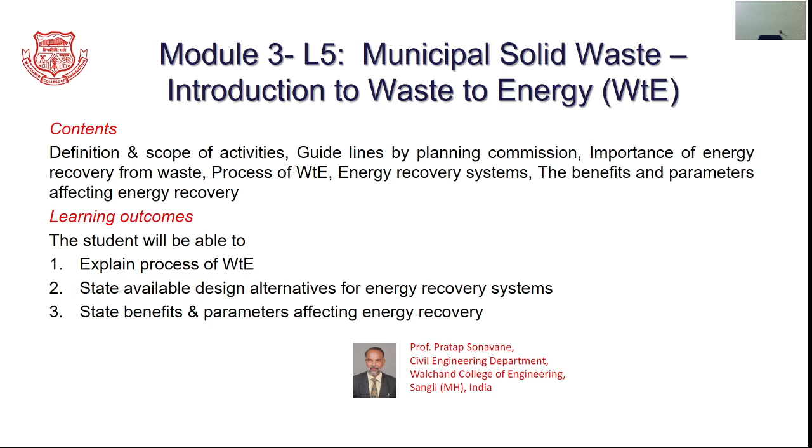We have been discussing the flow chart, especially the separation, processing and transformation element. So we know through certain processing facilities we are recovering the energy rich material, and that energy rich material is used to make useful products like refuse derived fuel, or otherwise these energy rich materials are transformed into energy by making use of thermal processing techniques.

We also know that the process of generating this energy in the form of heat or electricity is to be preferred only after following the elements of the waste management hierarchy such as reduction, reuse and recycling.

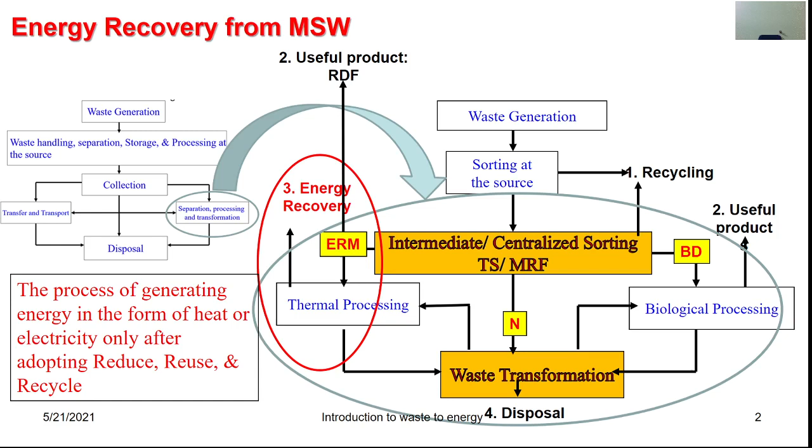Let's try to understand the meaning associated with energy recovery from municipal solid waste. The concept means the conversion of non-recyclable energy-rich waste components into usable heat, electricity or fuel by making use of processes such as thermochemical conversion, which produces heat energy or fuel, oil or gas, which in turn can be used to generate energy, or otherwise enzymatic decomposition of the organic matter to generate methane-like gas through biochemical conversions.

Ultimately, this methane is used to produce electricity. So, the processes of thermochemical conversion or biochemical conversion are commonly called waste to energy.

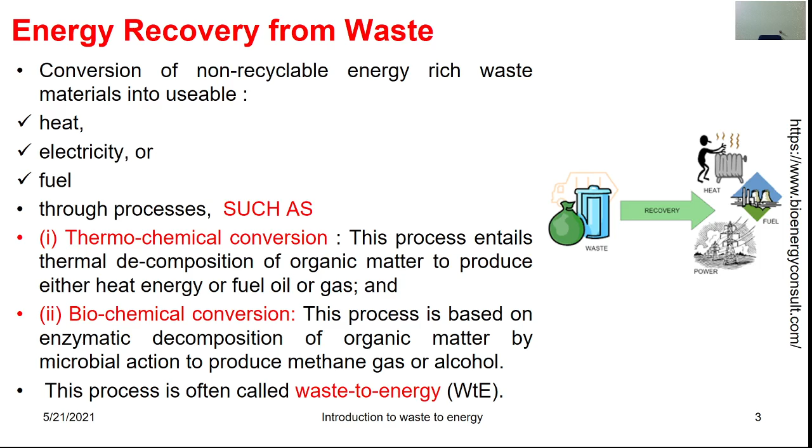There are certain guidelines as far as the provisions of the Municipal Solid Waste Rules 2016 are concerned. It mandates giving preference to waste to energy processes, including RDF for the combustible fraction of the waste, or supply as feedstock to solid waste power plants and cement kilns. Also, industrial units located within 100 km of these RDF or waste to energy plants should replace at least 5% of their fuel consumption with RDF.

Also, non-recyclable waste having a calorific value of more than 1500 kilocalories per kilogram should not be disposed of in landfills. In order to encourage the production of energy from waste components, the state pollution control boards are expected to examine applications for setting up waste to energy facilities to the tune of 5 metric tons per day and grant permission for such facilities within 60 days.

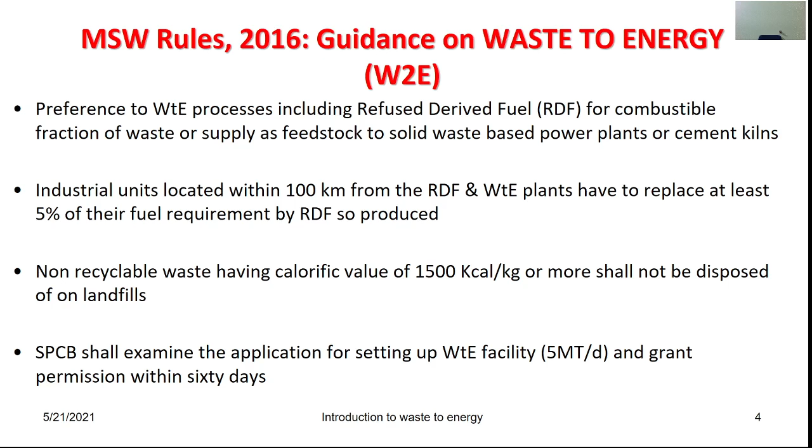Though the solid waste 2016 rules encourage waste to energy facilities, certain guidelines constituted by the Planning Commission in 2014 give the realistic picture associated with waste to energy, and the guidelines mentioned by them are essential precautions to follow.

According to the Planning Commission, waste to energy is a very expensive option for managing municipal solid waste, and it requires skilled staff as well as adoption of high level technologies. Though it has significant potential to provide energy, it also has the potential to cause significant environmental impact through the emission of fly ash, which is generated through the combustion of a portion of the solid waste as fuel.

Hence, certain guidelines are given by the Planning Commission, such as the necessity to evaluate the appropriateness of a waste to energy plant for the community. Also, the municipal authority must select a suitable concessionaire through competitive bidding for a long term not below 20 years. Also, the applicant willing to provide such waste to energy services must be a developer or technology provider who will actually construct, operate and maintain the plant over the period of these 20 years.

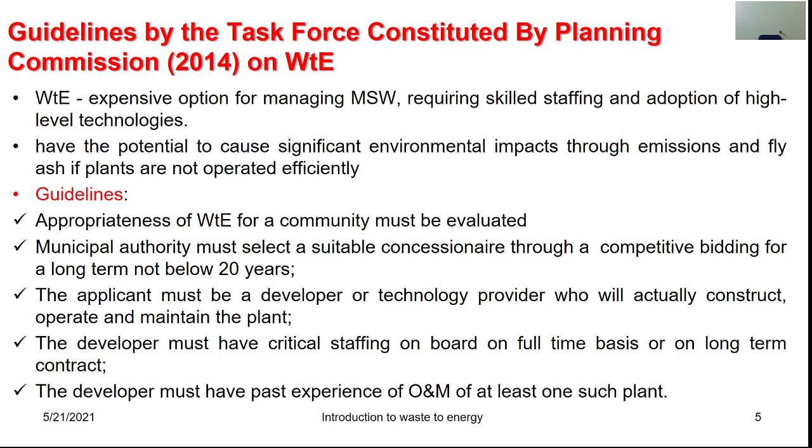We have to consider the provisions of the Municipal Solid Waste Rules 2016. As well, we have to take into account the precautionary measures as given by the Planning Commission. We must also take into account the importance of this particular energy recovery from municipal solid waste. This importance can be understood through these various points.

As we experience, the energy prices are continuously rising. Through this particular energy recovery, we can also go for recovery of the metals. We get the renewable incentives. The technology, if properly followed, can be a net greenhouse gas reducer. As the raw material is obtained locally, there is long-term price stability.

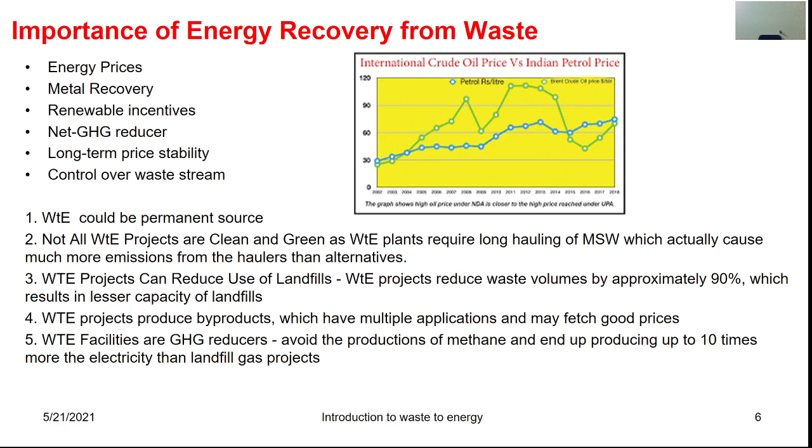But these projects can reduce the use of the landfills. These waste to energy projects can reduce the waste volume by approximately 90%, which results in a lesser requirement of landfill-like facilities. Even these waste to energy projects produce certain byproducts which have multiple applications and can fetch a good market value. These facilities, if properly run, are greenhouse gas reducers.

We can understand the process as such. Schematically, it is presented with this picture. The waste is received and charged into this waste pit. It is lifted up through that crane. It is fed through the hoppers into the furnace. The heat generated is used to generate the steam through the boilers. The steam is used to run the turbines and hence to generate the electricity.

Certain particulates and gases that are emitted are cleaned through air pollution control equipment such as scrubbers and electrostatic precipitators before letting them out through stacks into the atmosphere. Also, the waste generated in the form of ash, fly ash, which is collected through this electrostatic precipitator, is also treated and can be used for conversion into certain building blocks, or it can be disposed into the landfills and can also be used as cover material.

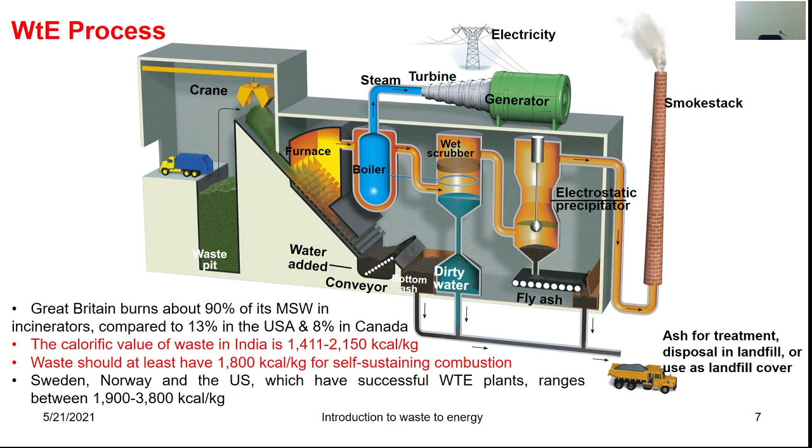There are kinds of energy recovery systems depending on the kind of turbine employed. So, there could be steam turbines, where the steam is produced in a boiler by burning this solid waste and used to drive the steam turbine, which drives an electrical generator to produce the electricity.

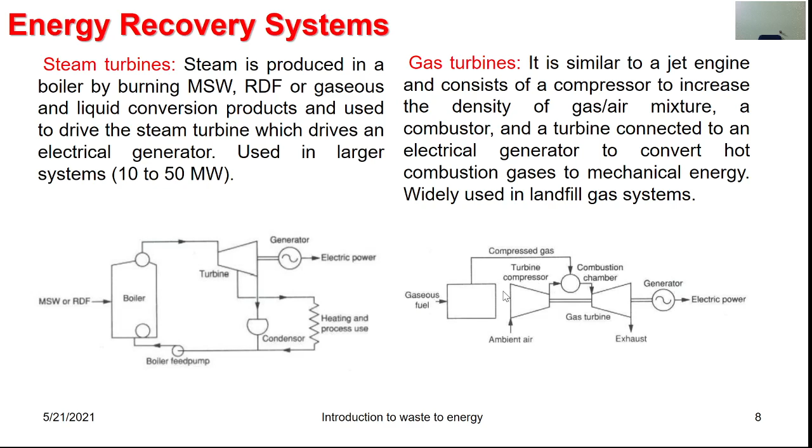There could be gas turbines, which are similar to the jet engine and consist of compressors to increase the density of the gas-air mixture, a combustor, and a turbine connected to an electrical generator to convert the hot combustion gases to mechanical energy. The processes are schematically presented in these sketches. There can be internal combustion engines using pistons and crankshafts, which are alternatives to these gas turbines, and accordingly such engines can be used to generate this electricity.

A variety of combinations using cogeneration with gas turbine, steam turbine and internal combustion engine can also be one of the energy recovery systems, where the generation of both thermal as well as electrical power is possible. Such systems are used widely in industry to generate electricity and process or building heat at the same time. Here, this particular generation is expected to be used on the site itself, which could be one of the limitations as far as this energy recovery system is concerned.

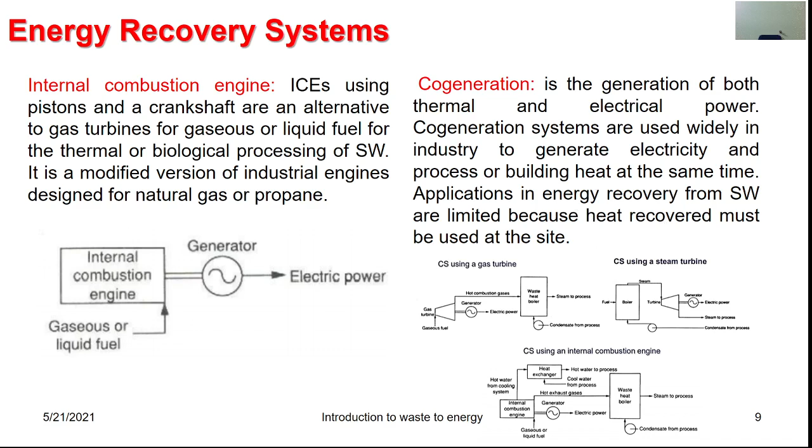There are many benefits associated with energy recovery. Firstly, there is a recovery of valuable resources which otherwise could have been simply disposed in the landfills. This is generating one more renewable source of energy. There is a reduction of carbon emissions as well as certain methane emissions. The total quantity of the waste is reduced by over 90% depending on the kind of technology that we adopt as well as the composition of the waste.

There will be considerable reduction in the demand for land, because now we are expected to deal with hardly 10% of the residue. Also, the cost associated with the transportation of the waste to far away landfill sites gets reduced proportionately. So the factors associated with the emissions, reducing the waste by 90%, reducing the land requirement, reducing the transportation requirements will have the net effect of reduction in environmental pollution.

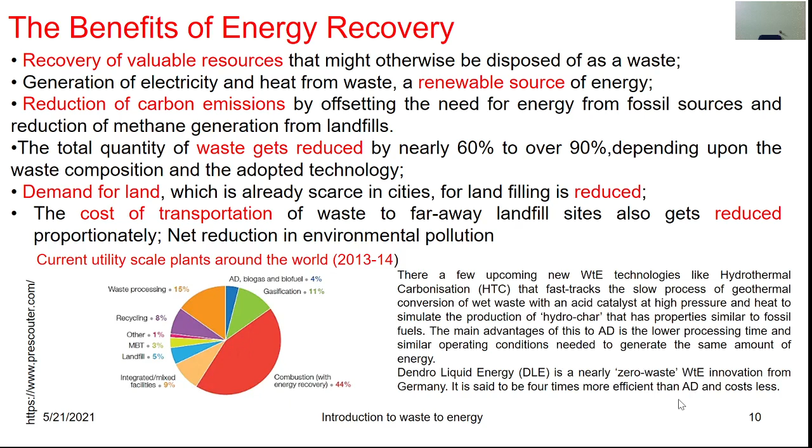We have to take into account the various parameters that affect waste to energy. First of all, we have to take into account the quantity of the waste. On average, 100 metric tons per day is required to generate 1 megawatt of power, and each megawatt of such power station capacity can supply around 650 average homes. There is a considerable impact of certain physical parameters in terms of size. The smaller the particles, the faster the reactions.

Also, the moisture content, especially associated with the initial energy consumption, as well as its interference with anaerobic digestion processes associated with bacterial activities. Also, the volatile solid content, which is again associated with bacterial activity, should be more than 40%. The fixed carbon content should be less than 15%. Inerts should be less than 35%. The calorific value, energy value, should be more than 1800 kilocalories per kg.

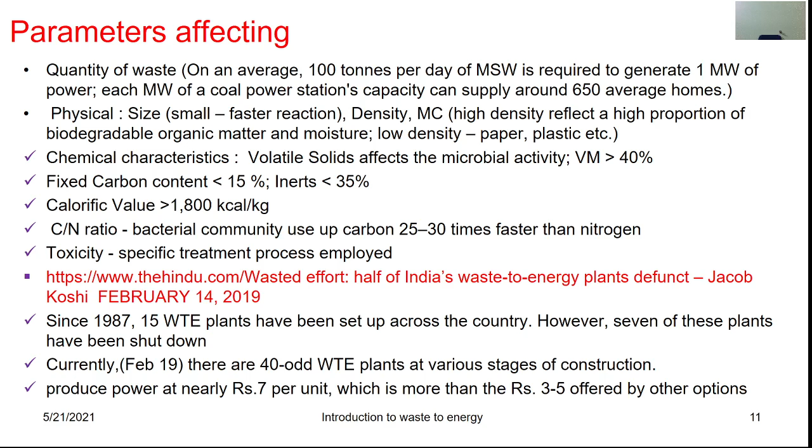So thank you for your attention, friends. I hope the basic concepts that we discussed about waste to energy plants are well understood. As we move ahead, we will get acquainted with the various thermal processing techniques.